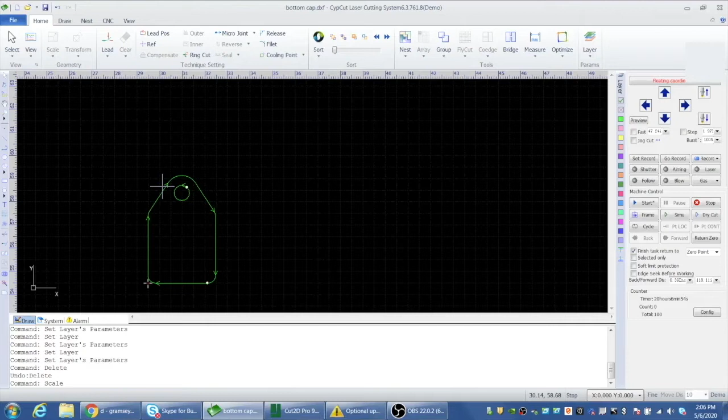This bracket that you see, I need to cut some of those for a real job for a customer of mine that I've already cut many of, and they need about 8 more of them. So just a simple little thing, but it can show you how to walk through the entire process of getting this cut.

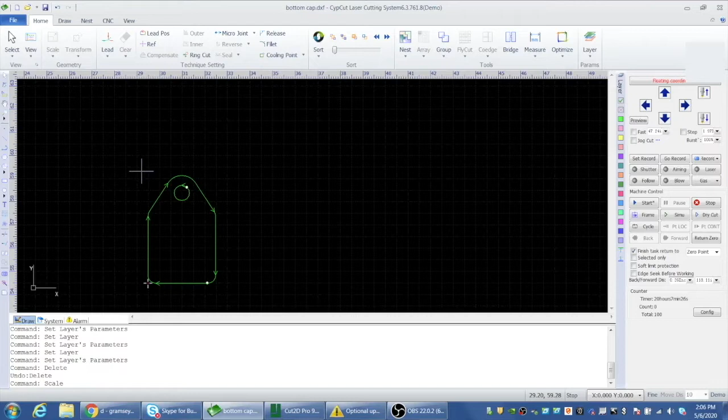If you're trying to cut a full sheet of something, you'll want to nest, and right here in the nesting part of it, which we'll cover in a future video. But if you just need to cut 8 of something simple, or 5 or 10 out of a little drop or part of a little corner of a sheet, then you don't really need to go into nesting. It's complicated and there's more to it, and this is quick and easy.

So to show you this, I'm just going to delete this and we're going to re-import it. We're going to go up here to File, Import, DXF, that's going to bring up our list, and this file is called BottomCap.

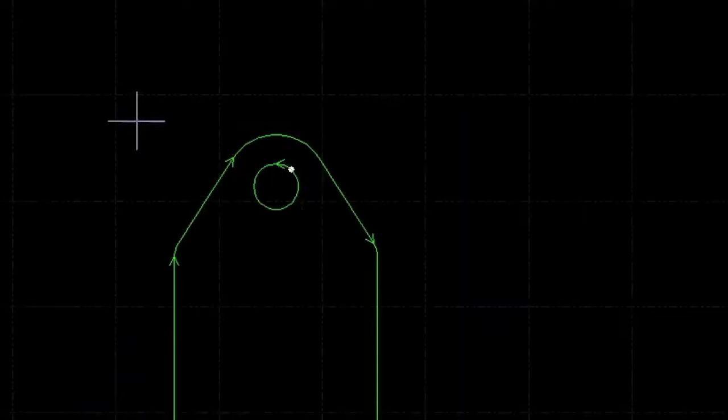Again, I'm using this evaluation software to do the screen capture on a separate PC, not my live machine. And for some reason, the scaling is off on this when I import something. This thing should be about 3 inches by 4 inches, and it's coming up scaled off. So this is good because it's just going to allow us to show you the scaling again.

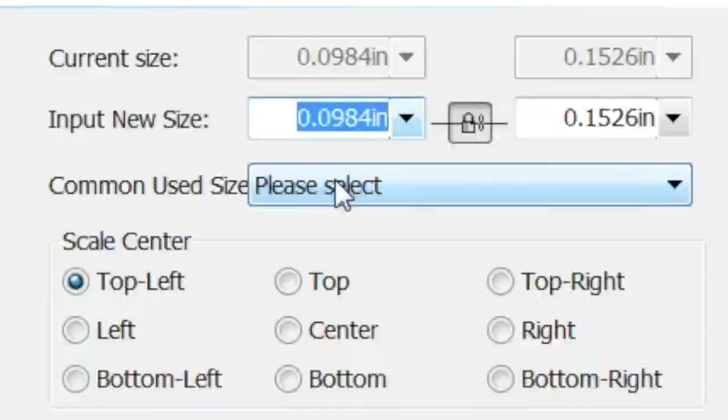So we're going to click Scale over here and bring up the scaling menu. It's not really that critical for what we're doing here. On the machine, I'm going to open it and scale it correctly before it cuts, but this setup part is going to be identical to that. So we're going to rescale this at 3 inches by 4.65 inches, and we now have our newly scaled part.

So before you duplicate this to create more than one of them, you want to do all your lead-ins and micro joining and anything like that to the individual part. There's a few things that we want to do before we create the array.

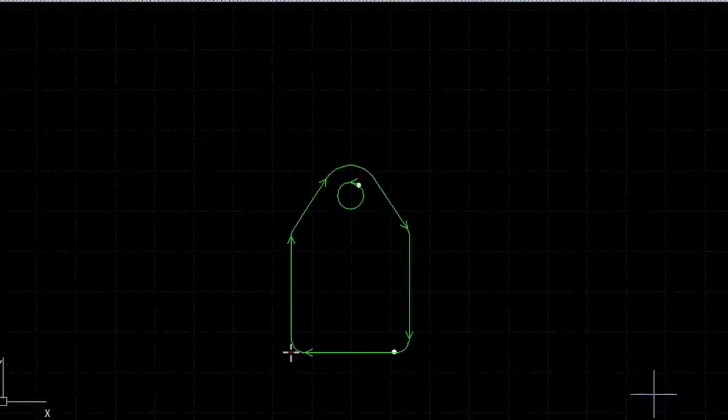One thing I didn't show you yet is you may want to orient this in a different way. So if you highlight it so that everything is selected and then go up to the transform menu, you get some options here that you can mirror it, a vertical or horizontal mirror. You can rotate it, things like that.

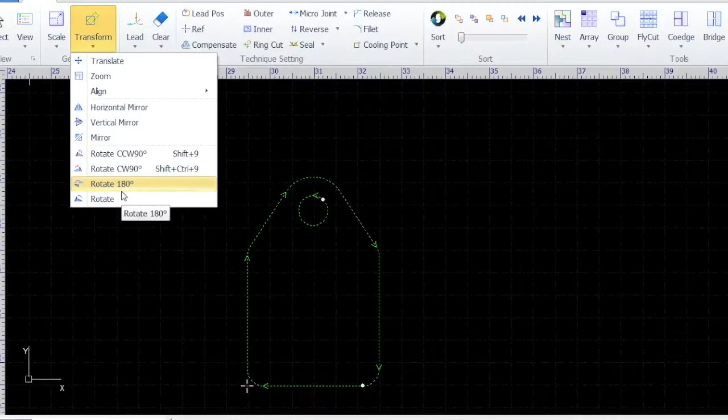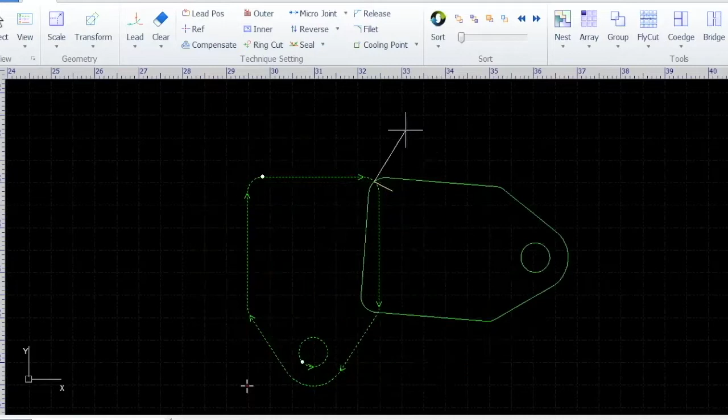A common thing to do is just a 180 rotate to flip it around, or a 90 rotate. You can also click the rotate menu in general and freeform rotate it, and you pick the axis that you want to rotate it on, and then grab it and rotate it wherever you want it to be off of that, and pick the rotation point, and then just leave it.

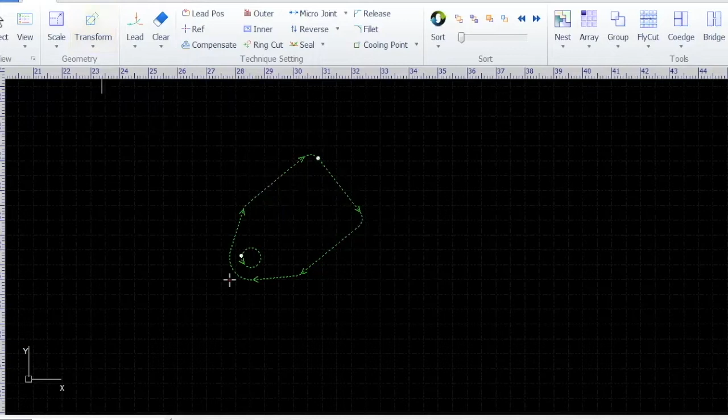But if you ever rotate that and then rotate something else, and then you needed to get this back to square in some way, there's no good way to do that. Once you sort of freeform rotate it, the only way to get it back is just to undo it, and get it back to a square position.

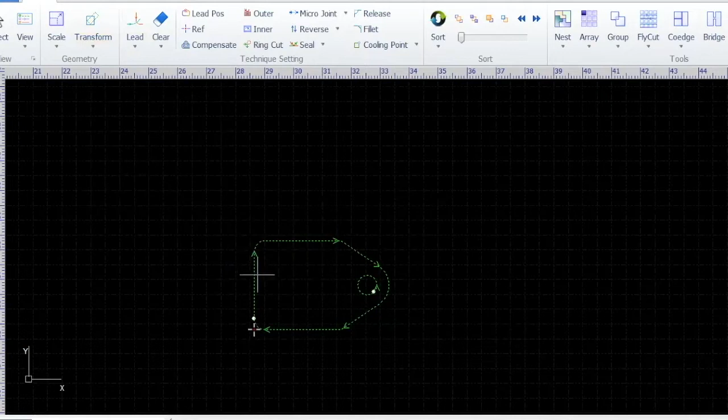But, so you got the transform menu, and you got some options there that you can play around with, 90 degrees clockwise, 90 degrees counterclockwise. And again, the 180 degree is a common one, 90 and 180. So just go ahead and get it rotated or oriented in the way you want it before you duplicate it or array it.

I'm going to put that back in that position. So here's something that you may commonly want to do.

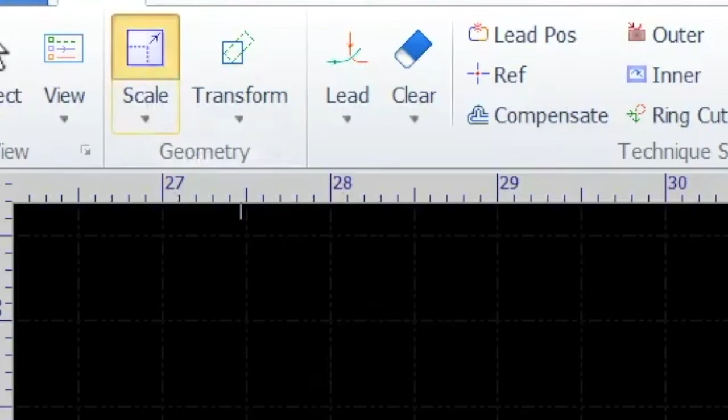Let's just say that if we go up to scale, we can see that this hole is a clearance hole for a 5/8 bolt, and it's 0.66 inches. And let's just say that you wanted that hole to be a little bit bigger, let's say 0.7, to give us a little bit more wiggle room.

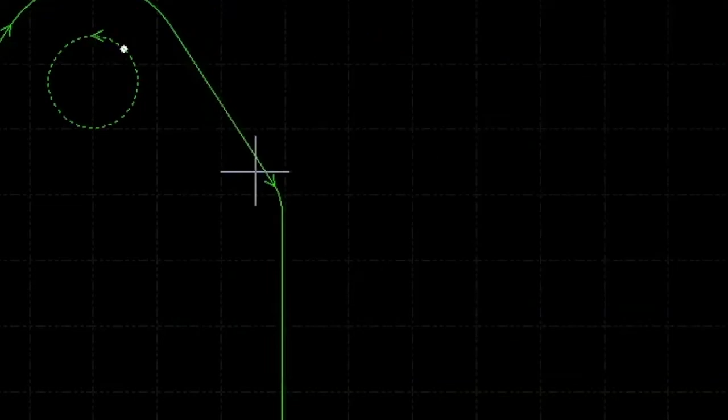And if I just click 0.7 and click OK, and if you watch the actual hole, you're going to see that it offset it to the right and down. So let me undo that again and go back to scale.

And you want to use this area right here if you're going to scale a bolt hole, to make sure that you scale it from the center so that it keeps the center line of the hole, or the center point of the hole, will stay the same, and it will enlarge outside the center.

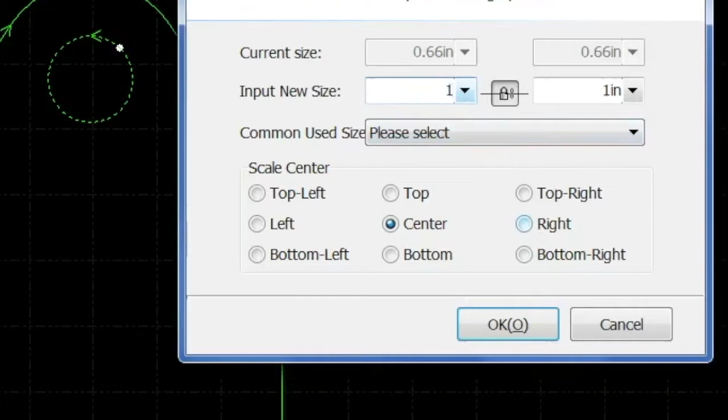And let's make it bigger so we can see that actually in action better. So I'm just going to say 1 inch, and I'm going to leave it in the top left so we can see. You see how it's now offset it from the part.

And we'll go back again, and we'll make it 1 inch and then say center. And now you see it's centered up, but just a lot bigger.

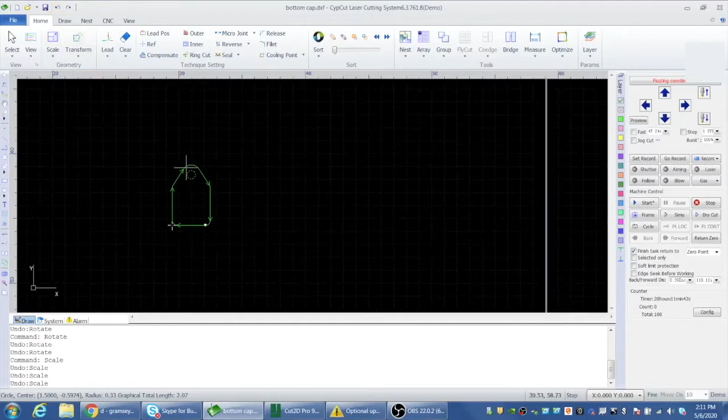All right, so that's something you can do on the fly if you're doing a small job and forgot to do it in CAM or things like that. So one other thing I haven't shown you here is that when you...

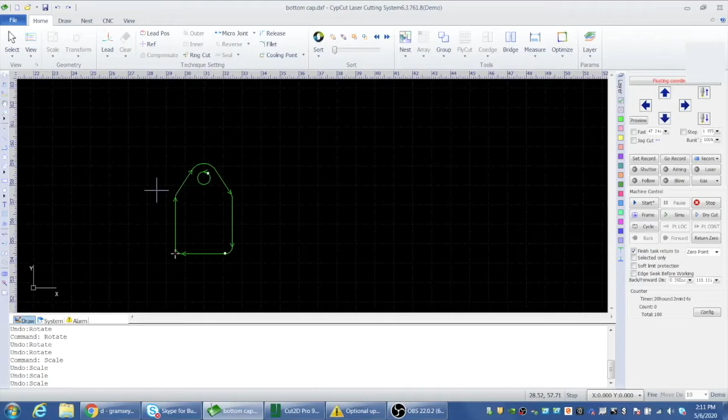By default, CypCut does not offset for the kerf. When you're cutting thin materials, the kerf is so tiny it doesn't really matter. You can cut 20 gauge and not have to compensate or offset anything. Just open it up and cut it and let it cut. You don't even have to do leads. But on thicker materials, if you want to get a hole dimensionally correct, you need to compensate for the kerf, or offset for the kerf.

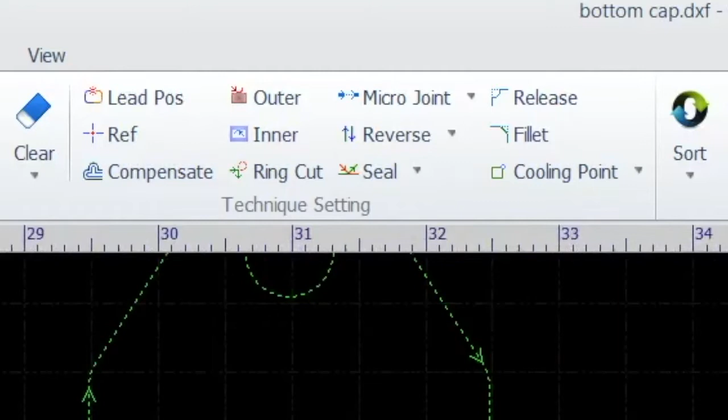So we're going to highlight the part, and I'm going to bring this up here close. And if you notice up here, there's the compensate button, and it brings up a dialog box. It's pretty straightforward, pretty simple.

Over time, what you're going to learn is for a given thickness of material, for a given nozzle size, how much do I need to offset it? Maybe you would want to offset the inside only, or maybe you'd want inside holes or offset holes only, that kind of thing. But let's just say we want to do a...

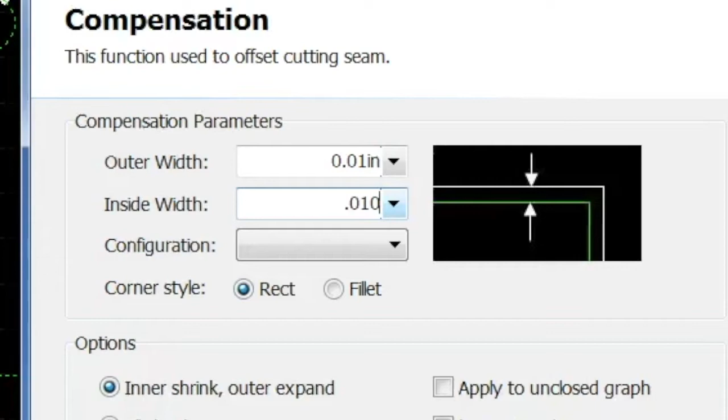0.010 offset. Again, your laser head, the thickness of material, all those kinds of things are going to play a factor, and you're going to have to do your own experimenting, cutting some sample parts to figure out what is the correct offset to get the part dimensionally correct.

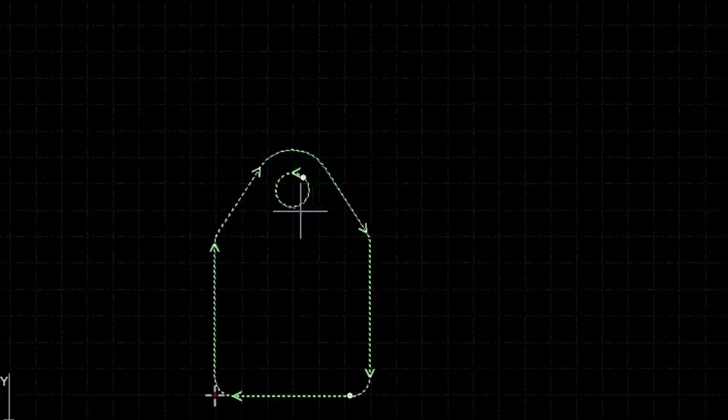All right, so you see when we click that, if you zoom in here, you'll see that now we have a slight offset. It's going to cut the inside features offset to the inside, and it's going to cut the outside features offset to the outside. The white line being the cut line and the green line being the original design of the part. So again, before you do any duplicating of the part, go ahead and do your offset.

The next thing you might want to do is put a lead in and a lead out. We've already talked about this a little bit, but we're going to go ahead and set the leads on this. We have an arc 45 degree lead, and it's 0.2 inches. I'm going to come down here and check outer contour only, and this will save us a little bit of time. So we're just going to click that, and bam, there's our outer.

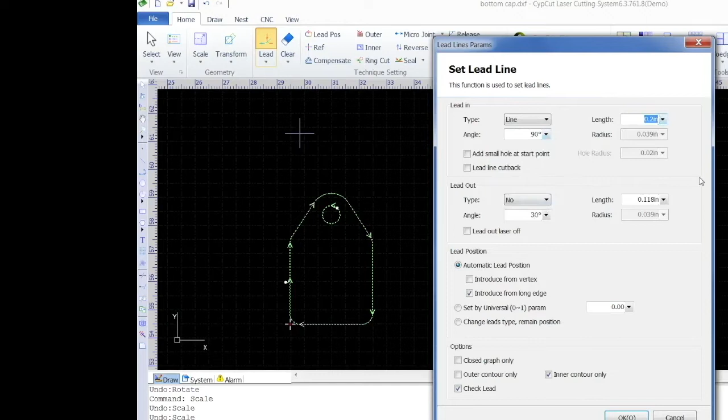And I'm going to click lead again, and I'm going to uncheck the outer and check the inner. I'm going to go up here and make this a line lead at 90 degrees, and make it half the dimension of the feature. We know that hole is 0.66. I'm going to make this point 0.3 to get it pretty close to the center. And bam, there's our lead for the center.

So now we've done all of our work to the individual part, and we know we want to cut 8 of them. So again, you want to highlight the part so it's selected, and you want to come up here to the array tool. If you've used any other CAD or CAM software and you know about arrays and so forth, you know how to do it.

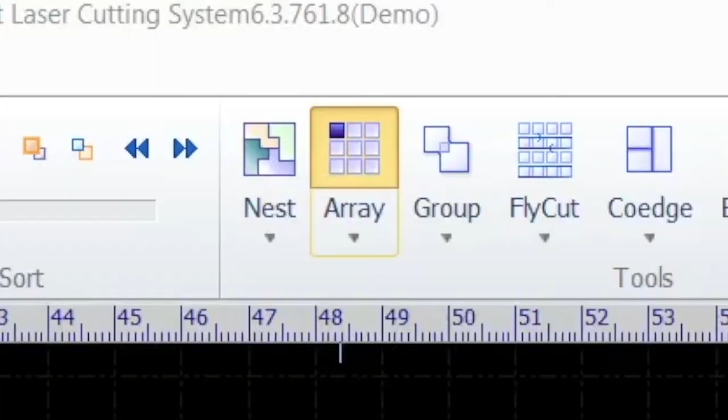We want 8 of these, so we're just going to make it an equal 4 and 4. And right here you can set the row and column interval or offset for how far apart you want these to be spaced. Normally these are going to be cut out at a quarter inch, so I use 0.2 on a quarter inch. It's pretty safe to use the thickness of the material as your offset amount. And here you can pick the direction.

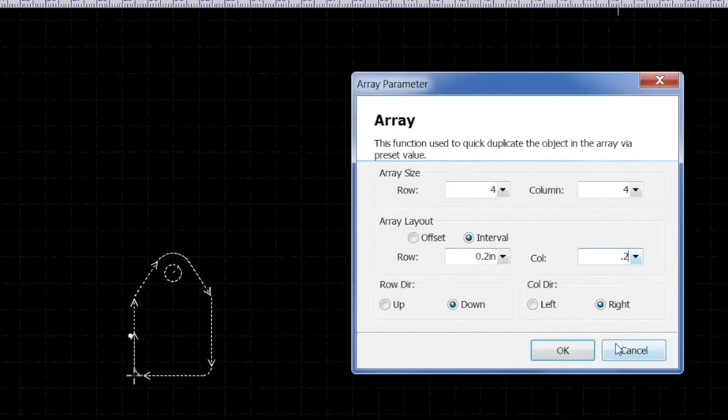I found these things not to really matter with the way the machine works. It doesn't really matter which way it arrays it, because you're going to cut it from the origin point down here to left and right based on how your machine's origin is set up. And that's it. You just click OK, and there's our 4x4 array. You can see our lead ins are in a good spot. They're right in the middle, it's going to pierce in the middle of the open area by an amount that's safe. And so we're good to go from there.

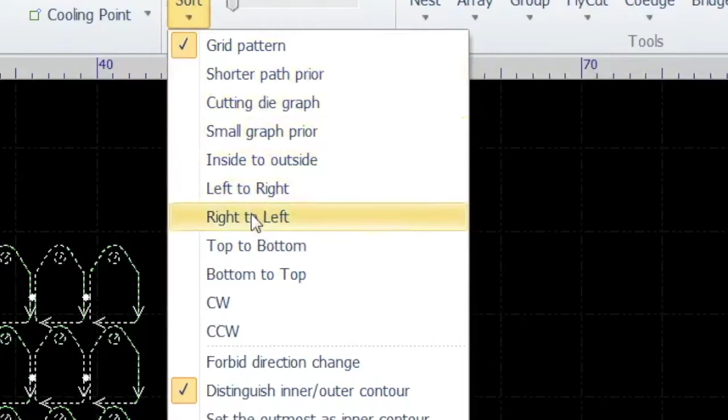And one thing I haven't shown you yet is the sort order. Again, if you're just cutting simple things, it's probably not going to matter. When we get over to showing you the nesting, there's a separate sort method over there. But let me just show you the options on this. You've got several predefined options that you can do, and there are some best practices on this, and some schools of thought about which way is best, of what the choices are. But I'm just going to say bottom to top.

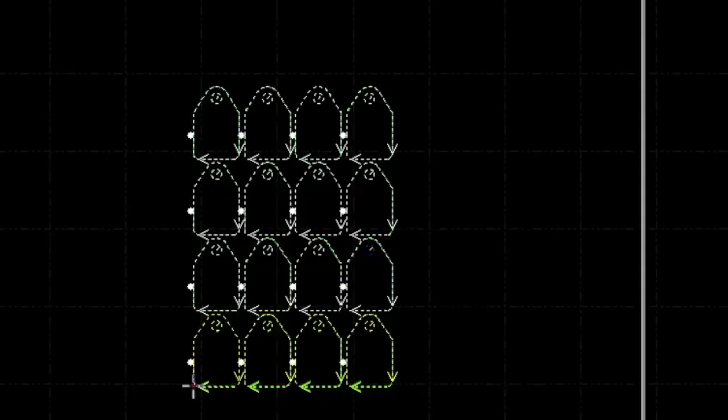If you want to do a simulation to see how that's going to work, you can grab this little slider here and see it simulating. See it's going left to right, bottom to top, zigzagging back and forth for the cut. If we change this left to right and do it again on the simulation, now it's going to go up and over and down from left to right.

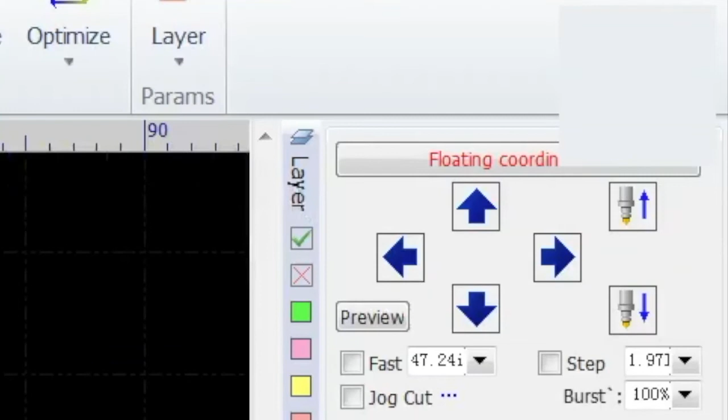After that, we're going to pick on our layers. If you've got a predefined layer already set up, go right here to this little open folder, and it's going to give you a warning telling you that if you read this, it's going to blow away your current settings, and you say yes. We're going to find we want to cut this at 1/4 inch, or 6 millimeter, using oxygen, pick that and open it, and bam, it's going to bring in our settings.

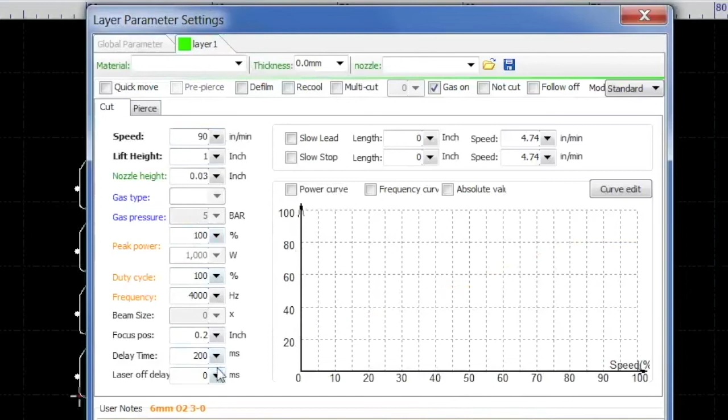From that, we're going to flip over to the machine, and I'm going to show you a little bit more about the positioning and the setup, and we're going to cut this job.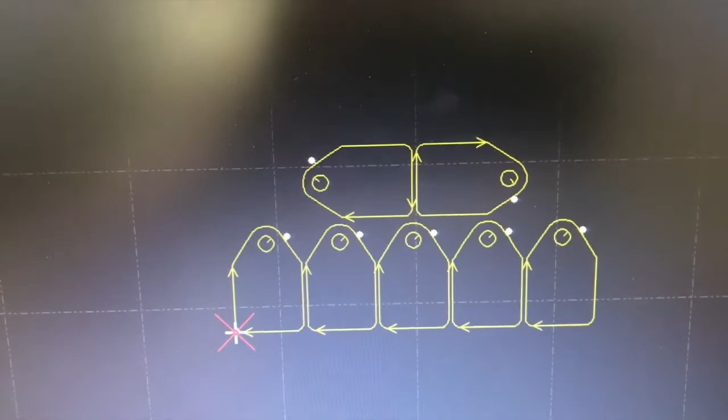Okay, so we've got a drop setup that we want to cut those parts out of, that we went through on the simulation software to show you all the details of the features. I had to change the nesting around on the production machine out here a little bit to fit that drop.

So from here, just like we showed you there, we're going to click on the layers. That's going to bring up the dialog box. We're going to go right here and open our folder, and it's going to give us the warning message. From here, we want to pick on our 1/4 inch oxygen and say OK.

Now we've got our layer opened up for that. Again, this is a really good dialed in set of parameters to cut this with, and you'll be getting a copy of that when you buy the video series.

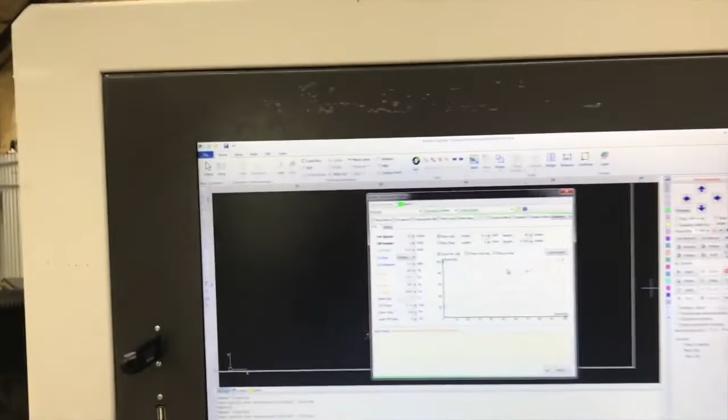So from here, we can check to see if this will fit our drop. But it's kind of tricky with an odd size drop, because if you just do the frame command like we showed you in the other video about the remote, you'll see that it'll frame it out off the drop.

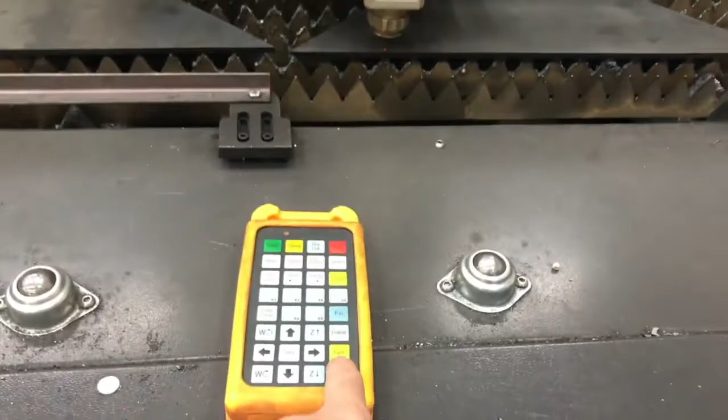So I'm going to hit frame here. Well, you can't frame it without the... If you ever hit a button on the remote and it's not acting right and not accepting the input, it means you have something open on the screen. So let's go back and hit our frame button here. See, it frames it off outside the sheet.

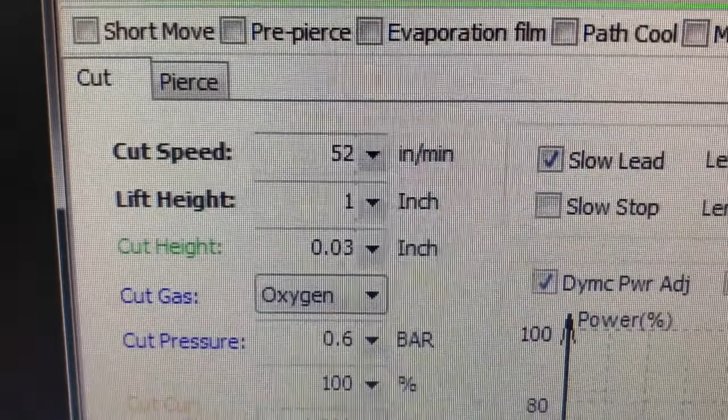So what we need to do is a dry run, but we don't want to do a dry run at the speed we'd normally cut 1/4 inch at. So real quickly, we're going to go into our layers, and right here to the speed, and I'm going to make this 300. You got to remember to set this back before you do the cut.

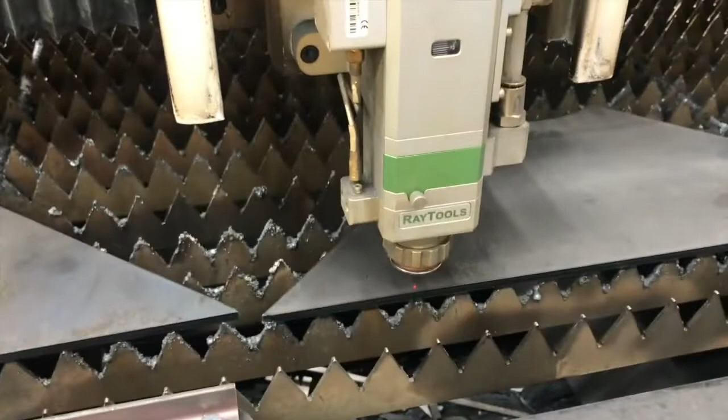And we're going to do a quick dry run just to look at it and make sure it's going to cut that on the sheet where we want it. So dry cut right here instead of frame. So we're fitting that all in.

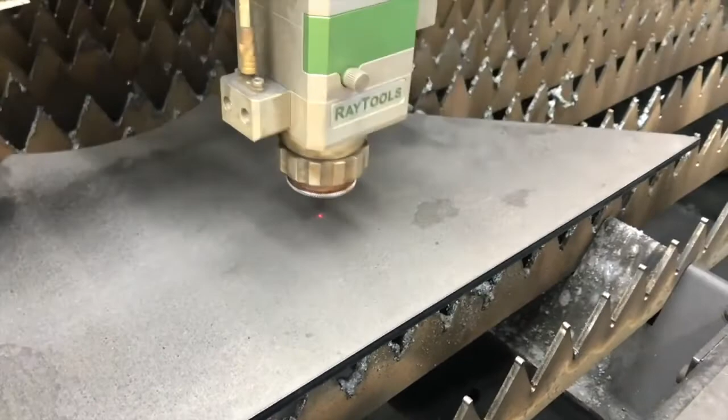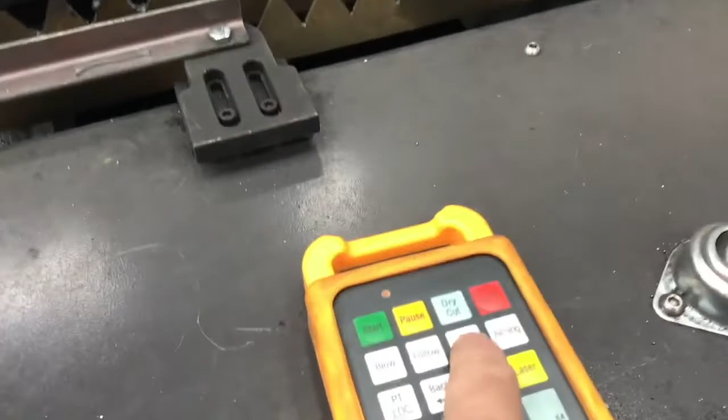So we're ready to cut that now, and I am going to turn the shutter off, because as we showed you in the earlier part of the video, it won't cut with that on. From here, you want to return to 0, so it puts the machine back where we left it.

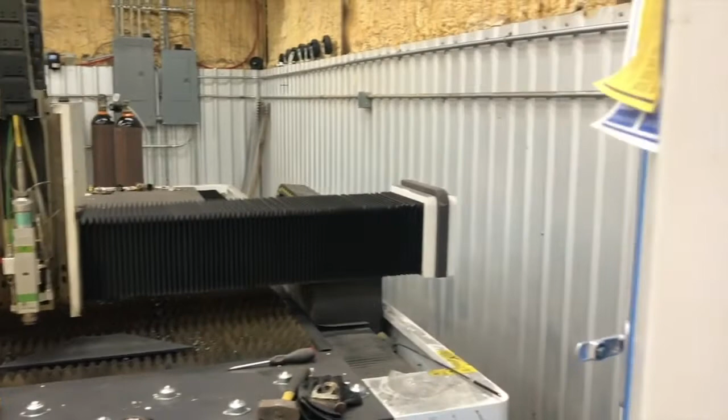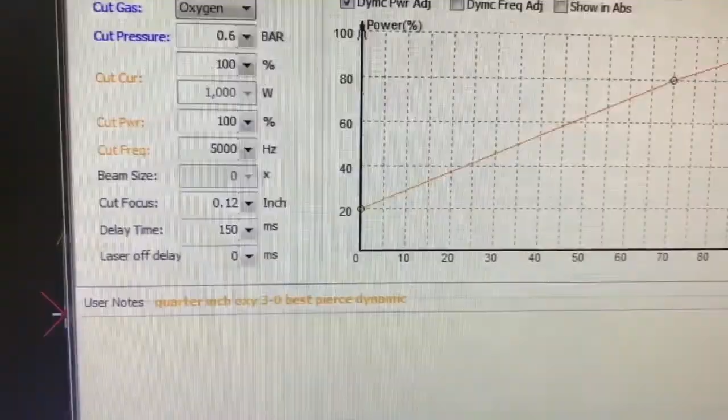And we want to go back into the layers and change our speed back to 52. And we are ready to cut the job. So let's get it fired up and cut it. We're going to cycle start it and watch it cut.

Now that piercing routine, I'm going to have a dedicated video in your series here, but you're going to watch a little bit later on how to dial in your pierces for thicker materials. But you can see we're getting some good cuts there, and we'll let those cut and wrap it up here at the end of the video when they get done.

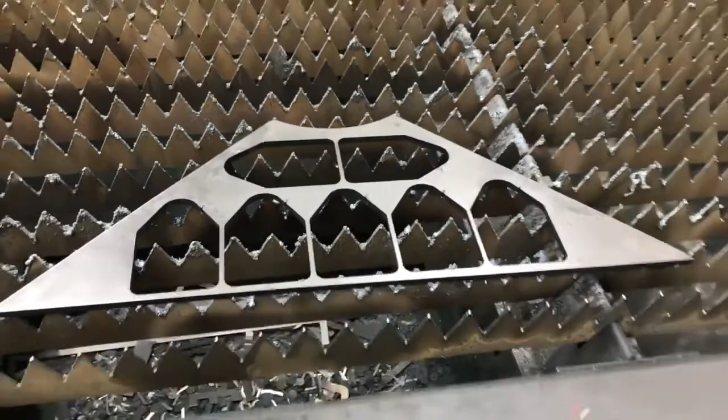All right, you see we maximized our drop and got pretty much everything we could out of that. And there's our parts. Got nice cuts on those.

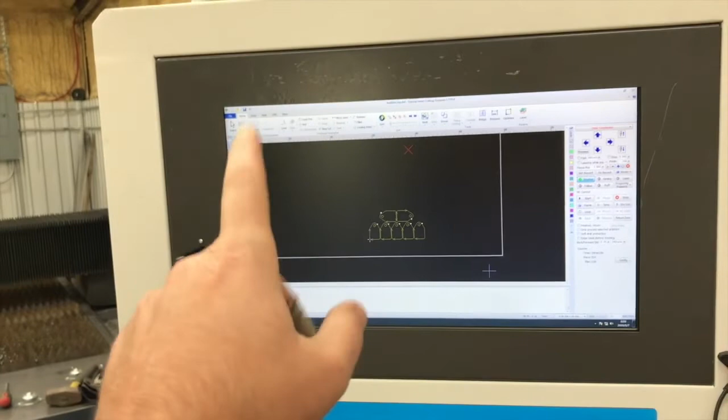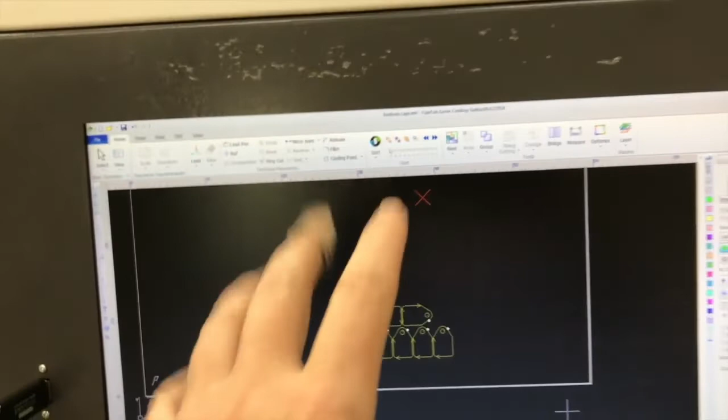So just a quick review: we walked you through doing an import of a drawing, scaling the drawing. We talked about transforming the drawing, rotating it, and then we set our individual leads, compensation, offset, all those kinds of things at the individual level. Then we went into our array tool and arrayed the parts in a grid, and then framed it out and cut it. Start to finish, an entire small production run of a job, cutting a few parts out of a drop.